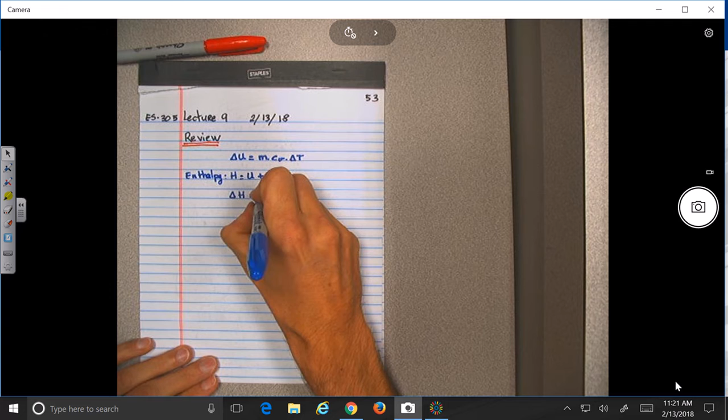Which is defined as what? Internal energy plus work done by the pressure. And we say that the change in enthalpy will be proportional to what? M Cp delta T. So notice that change in internal energy is related to Cv, and change in enthalpy is related to Cp.

So basically in this one, trying to give an explanation, this would just be like you have a closed system. What is the change in internal energy within the system? And that the delta H, in addition to taking into consideration the change done within the system, we also take into consideration the work done by the pressure.

All right, so let me give you some relations. So this will be relations you can add to your units sheet that you can take in the exams. All right, so those relations, let me go find them on the book.

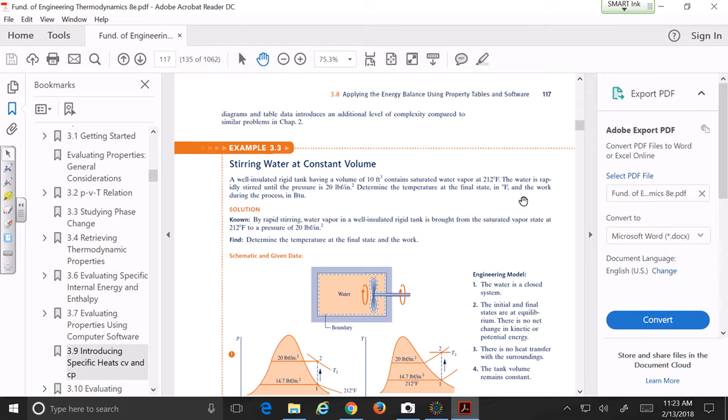So we are on chapter 3, so I'll see if I can find them here. This relation between Cp's and Cv's. So basically, we've been talking about Cp's and Cv, and gamma is defined as, so what was gamma? Do you remember gamma? We say different gases have different compression ratios, no?

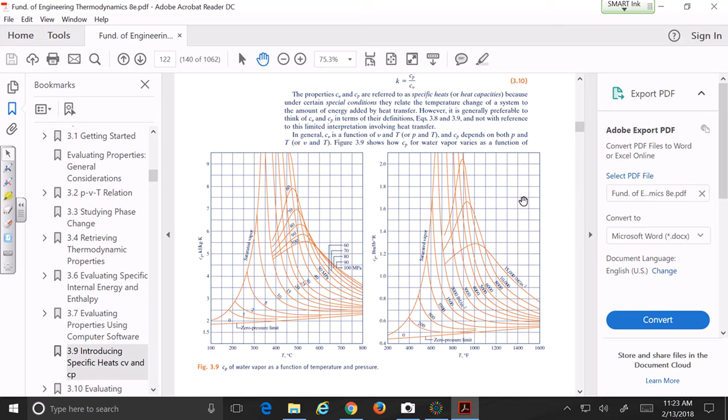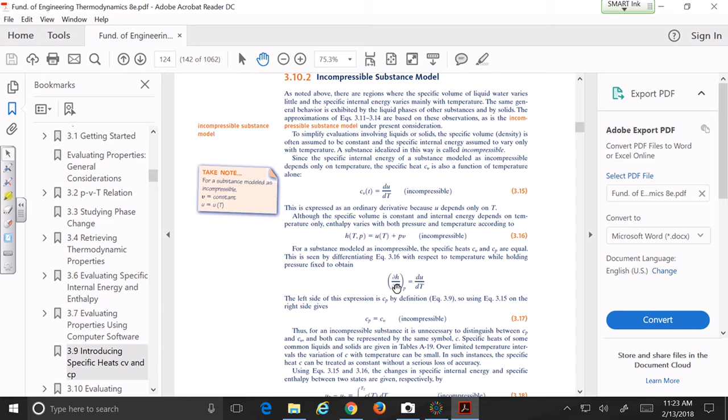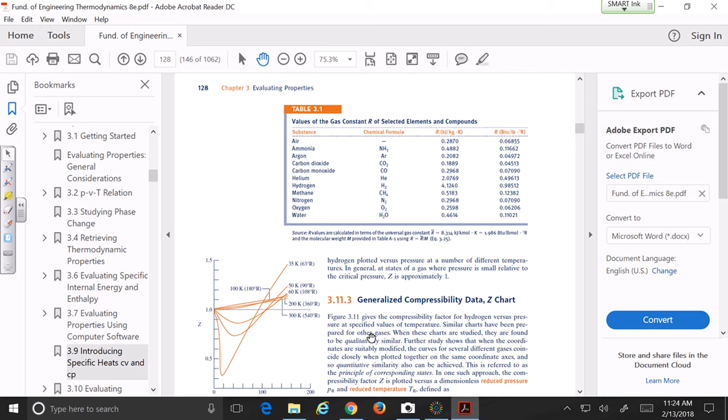Okay, so the real definition of gamma is Cv over Cp, or vice versa. Let's find out these different relations then. So Cv, I told you, is the change in internal energy as a function of temperature at constant volume. Cp is the change in enthalpy with respect to temperature at constant pressure. So for incompressible substances, you have Cp equal to Cv. But let's page down, let's see if we find the relation for compressible.

Okay, what are the relations? Is this not showing the whole page? Okay, there we go. All right, so it's actually reversed. So let me come here... oh, I don't have to do that. So let me remove this, and let's see if I can do this over here. Maybe I can do the other side, maybe better. All right, so basically gamma, which is the gas constant.

All right, so in the relation, for example, we have PV to the gamma equal to a constant - for what type of process is this one called? Polytropic process, no? So you have a different gamma for different gases because different gases might compress differently, okay? So that gamma, which in the book is called K, is defined as being equal to what? Cp over Cv.

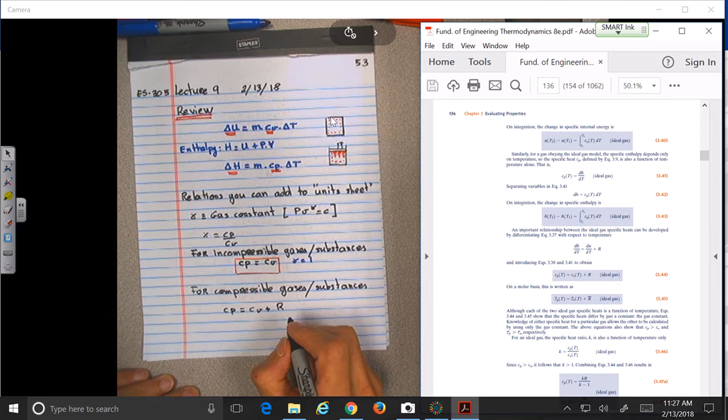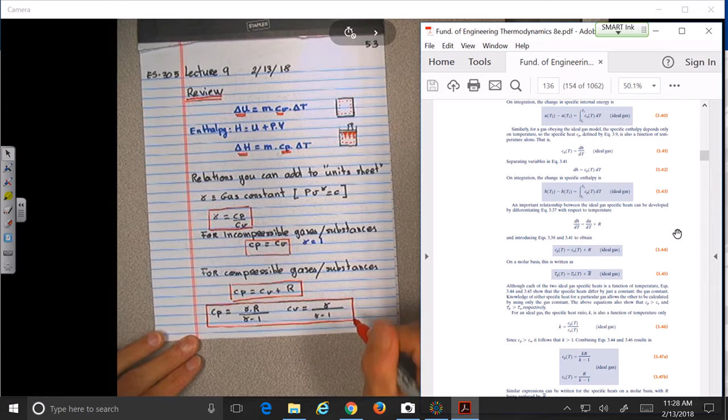Okay, so if we combine this equation here with this equation here, you can actually show that what? Cp, C sub P is equal to gamma R divided by gamma minus 1. And that C sub V will be equal to... R divided by gamma minus 1. No, it's both gamma minus 1. If you look at it, I'm just copying this relation from here, okay? Their K in the book is our gamma.

Okay, so this relation - there's nothing to derive, so I'm not going to ask you to memorize them. I think that learning is understanding, and there's nothing in understanding in memorizing, no? So these relations here, you can see like gamma equals Cp over Cv, Cp equals Cv plus R, and these two relations over here. You are more than welcome to add them to the unit sheet that you can bring to class and to the exam. Again, I'm not going to test you in memory. I'll test you in understanding.

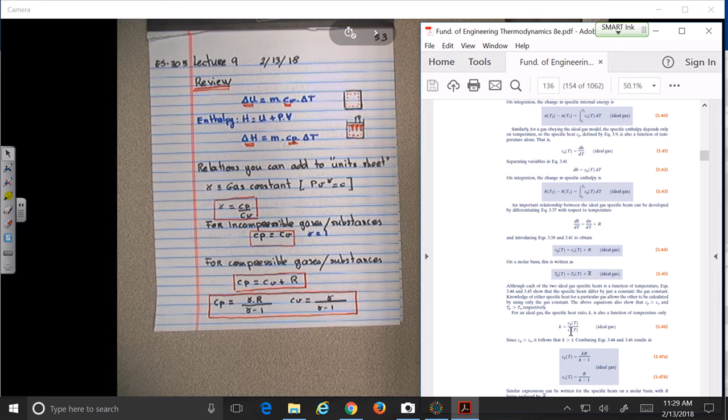Yes? On the 3.47b, is that the one that you were doing for CV? It's got R on top. Yeah, but what I'm saying is that you see on the book is K, no? Right. Okay, the K and the class notes is our gamma. Well, I mean the one below that because it's got an R. Oh, it's R. Oh, C for CV. No, you're right. So you're completely right. So this one is, instead of gamma, is R. Yeah, sorry for that. Thank you.

Okay, most important here is that really you realize what? Is that you see here that the change in internal energy is proportional to Cv dt, no? That's really the part that I want you to understand. And the change in enthalpy is equal to the integral of Cp dt. That's the important part for the understanding. This is a matter to know these relations, in case you need to use them in a problem.

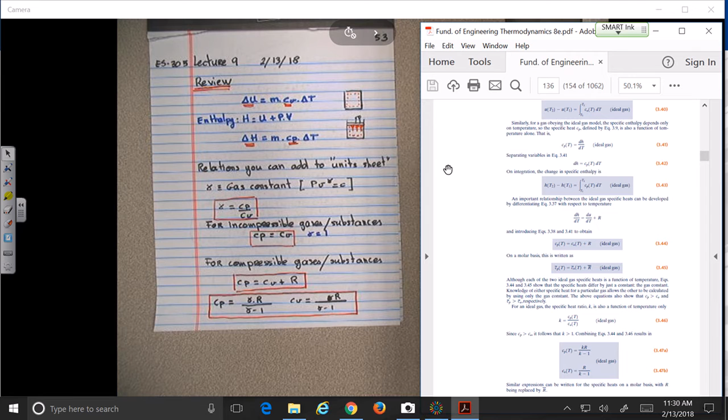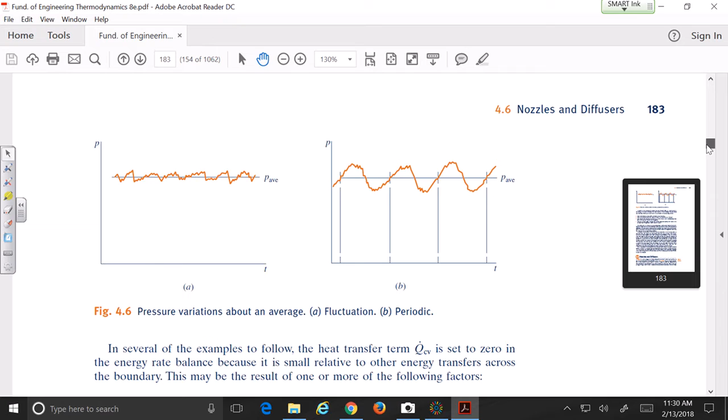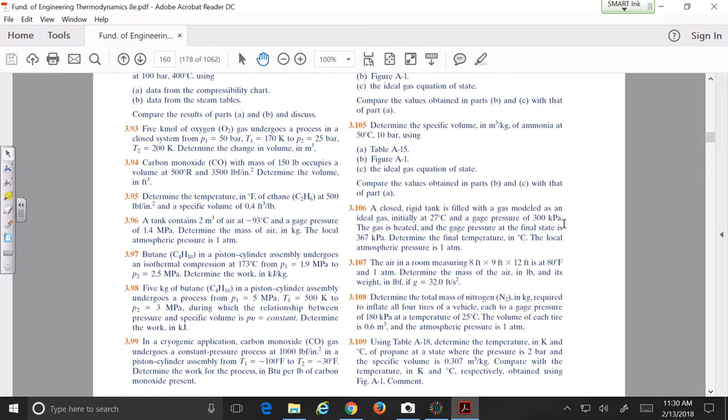All right, so let's do problems. Let's see what we can do. So let me magnify this for a second, and let's try to find problems on chapter 3. I think I went a little bit fast here. So what is the highest number we did as the homework problem so far? 56, okay. 3.89 is a classic one for something different.

Okay, let's do 3.85, okay? I like the one with pictures, I don't know why, but. So 3.85. Let's see what that problem is about. So page 54, we're gonna do problem 3.85.

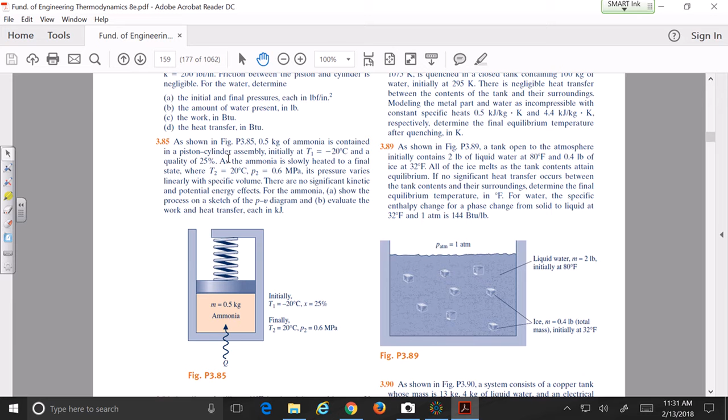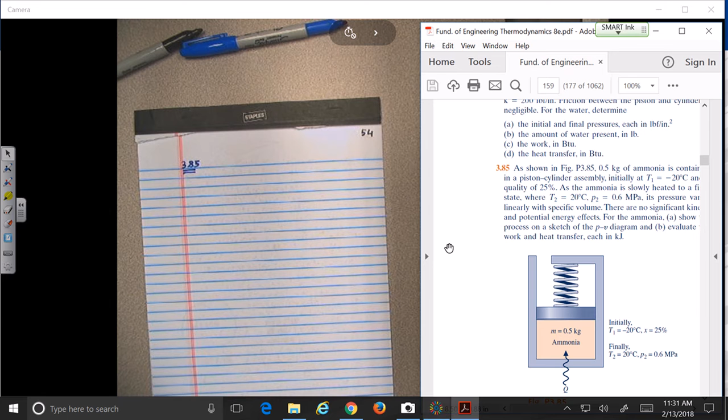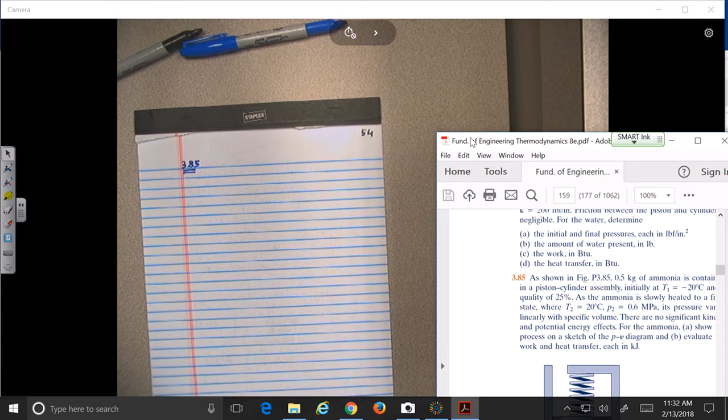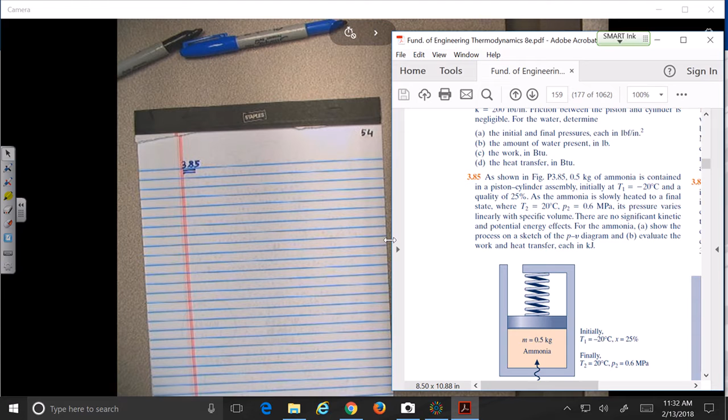Okay, so let me see if I can do this again here. I'm gonna minimize the bottom. Oops, that's not what I wanted to do. You see what I mean? I wanted to make it a bit here shorter, but a bit wider. There you go. Okay, so that way we can have the problem statement and my page.

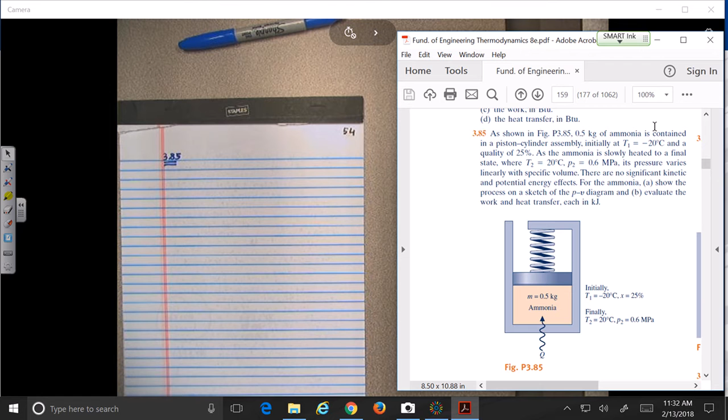Okay, so as shown in figure 385, let me do a little sketch here of figure 3.85. Remember all this is part of the solution of the problem. Okay, so our system here is this one over here. M equal half a kilogram, and what is the substance? Ammonia. Okay, looks like to the ammonia they're gonna add some heat Q, and that we know that initially we have T1 equals minus 20 degrees Celsius and X1 equals 25%, sorry. So what is the state of the ammonia?

So it would be a mixture as state 1, no? Then at the end, they give us that T2 is equal to 20 degrees Celsius and P2 equal to 0.6 megapascals. Okay, so let me start reading the problem. So as shown in figure 3.85, half kilogram of ammonia is contained in a piston cylinder assembly, initially at T1 minus 20 degrees Celsius and a quality of 25%. As the ammonia is slowly heated to a final state where T2 equals 20 degrees Celsius, P2 equals 0.6 megapascal, its pressure varies linearly with specific volume.

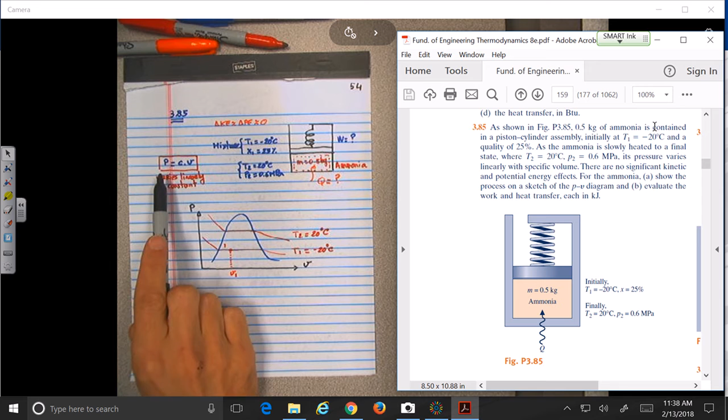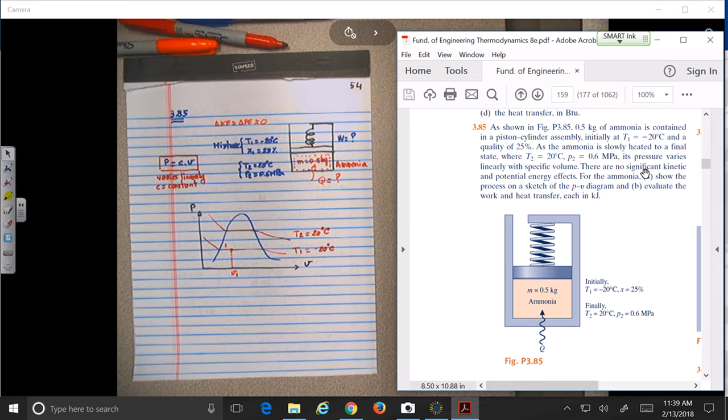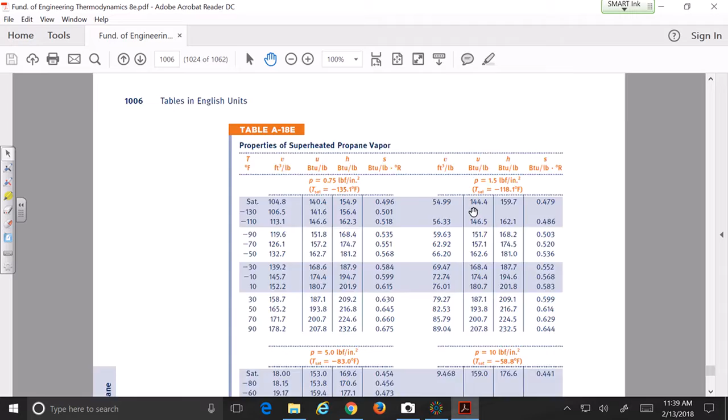But anyway, so we know this, let's see. We need to go to the tables for what substance? Ammonia. Again, I ask you to bring the tables. I'm going to go big here because I don't want to waste too much time. So which one are the tables for ammonia?

13? Okay, otherwise I will go to... what is this one, 5, come on, 13, okay, I trust you. I'll go here. Okay, 9. This is refrigerant 134A, 12E. Okay, for ammonia, so here we have table A-13E.

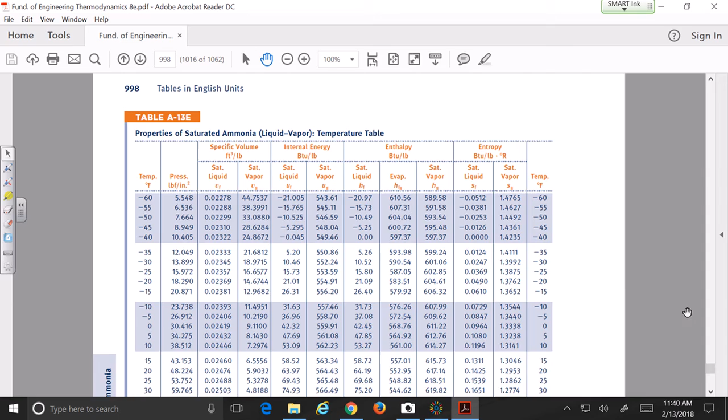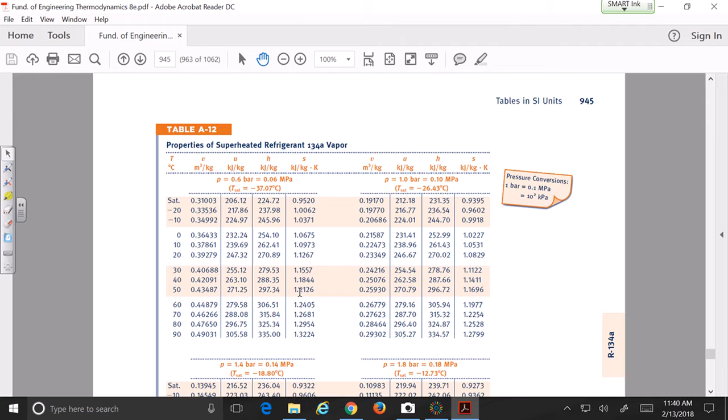So this is for English units, that's not the one we want. We want the one with... so page down, this A-13. Okay, so temperature for ammonia, liquid vapor, this is what we're looking for.

So minus 20 over here, all right, would be this line over here. Okay, so from table A-13 at T equal minus 20 degrees Celsius.

Let's see, what do we have? I don't know what is all the information we're going to need, but okay, so let's say P1 should be equal to what? 1.9019 bar, no? Okay, next, what do we have?

V fluid, V gas. Which one needs to be higher, the V gas or the V fluid? What takes more volume, gas or liquid? Gas. So let me write the one for the gas. So the gas is 0.6233 cubic meters per kilogram, no?

So what would be the value for the one of the fluid then? Is it 1.5038 times 10 to the 3 or 10 to the minus 3? 10 to the minus 3.

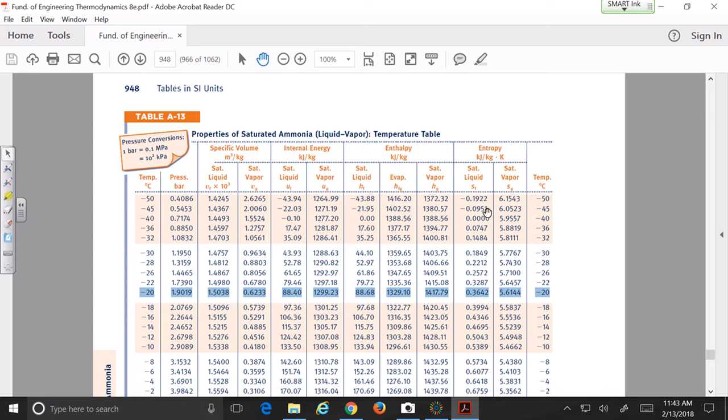Okay, I was writing all this stuff, but I needed to see the table, so I just wrote all that information there. That's why I asked you to bring the tables, no? Again, guys, I'm not trying to scare you, but if you don't practice using the tables, it's like doing a free throw in basketball, no? You are taking a gamble. So in order to know how to use the tables, you need to practice.

What's the power on V sub F? It says times 10 to the negative 3. You see on top of the table the part times 10 to the 3, no? So what it means is that they have pre-multiplied that value by 10 to the 3. Oh, okay. Yeah, it's tricky.

That's what I told you before. The way to remember this, if you need to multiply by 10 to 3 or 10 to minus 3, is to understand what takes more volume: gas, a substance in the gas state, or in the liquid state. Okay, makes sense. That makes sense? Yeah, it's tricky, I agree with you.

All right, so now that we know VG and V fluid, how can we find V1?

Do you remember that page where you have the two figures, PV and TV diagram, that has on the first side like 3 or 4 relations? One of them is what? V1 will be equal to what? V fluid plus X1 times V gas minus V fluid. Yeah? Remember that page? Okay?

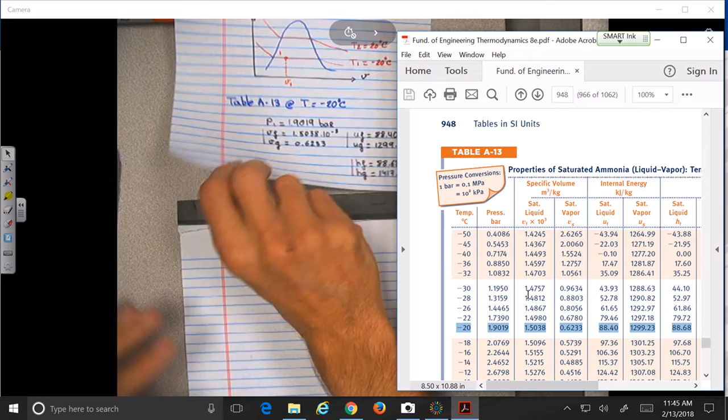So we have V fluid is 1.5038 times 10 to the minus 3, plus X1 is 0.25 of... is that relation correct? Is it V fluid? Yes, no? Yeah, did you check it?

And then we have V gas is 0.6233 minus 1.5038 times 10 to the minus 3. So if you do the calculation, what do you find for V1?

I don't know, so I could look at the solutions, but to me the solution is not what's important, it's the process, no?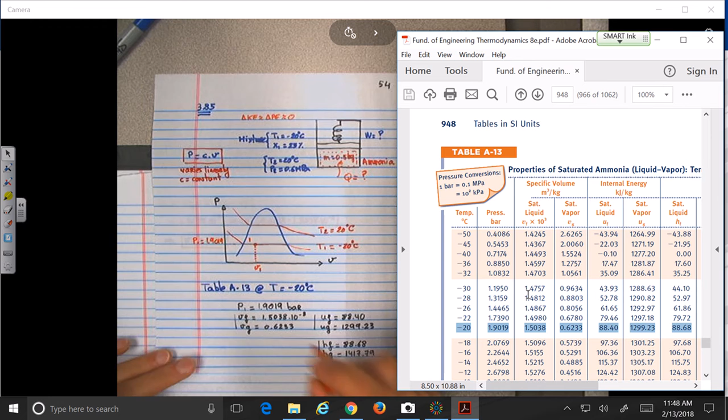So anyway, we have this. So now in this figure, if we want to be very accurate and add values, what was P1 over here? 1.9019. Now we know P2.

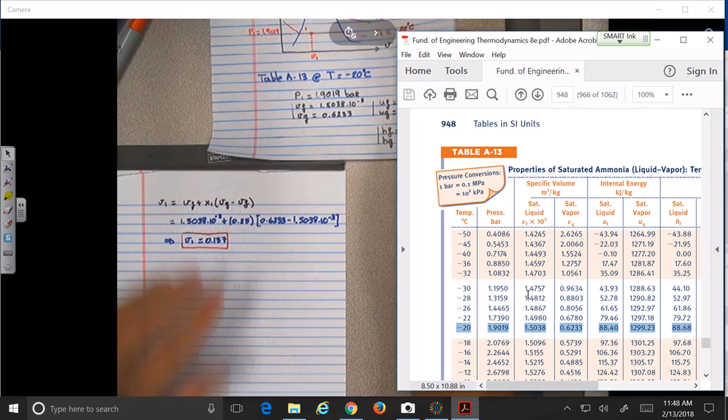So what is the state at 2 now? How can we find what is the state at 2? So we know the temperature over here, and we know the pressure, no? Okay, so if we go to the figure, let's say we go to the figure of temperature.

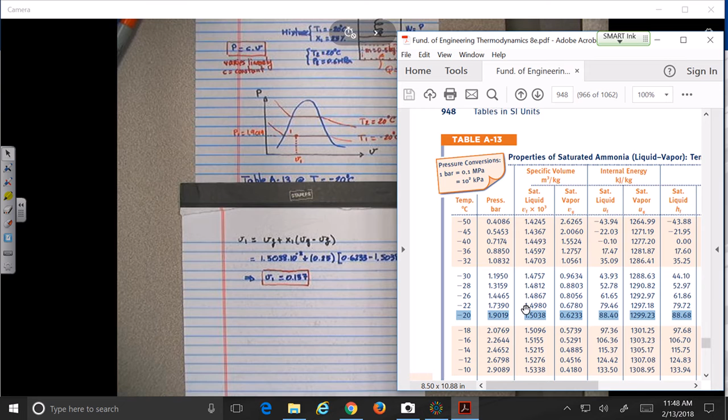So we go to 20. So what is the temperature at 20 here? What should be the pressure? 8.5762, no? So that means that if we look at this figure, the pressure corresponding to this line over here should be 8.5762.

But P2, what are the units for that? Bar. So we need to be careful, we need to change that. So 8.5762 bars, yeah, so that will be, okay.

So let's do one thing over here. So let's say P2, we know P2 is equal to 0.6 megapascals, no? Yeah? Okay, what was the relation? 1 bar was equal to how many kilopascal?

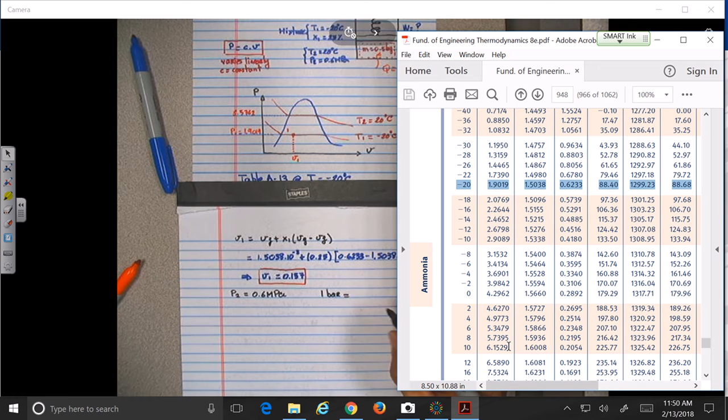I think it's about, what is it, 1.015, something like that? Check the relation, what is the relation between bars and kilopascal? Is it 1.015? I mean, you have that page, guys, with the units. I don't have it, so what is the relation between bars and kilopascals?

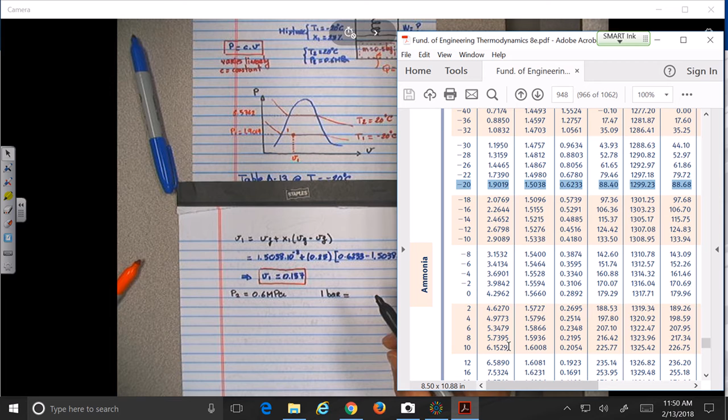One point? No, 0.1 megapascal. So 0.1 megapascals? Is it on top of the chart over here? Yeah, okay good, so then that's good then. Okay, so 1 bar is 0.1 megapascals.

So that means that this will be how many bars then? What do you mean 0.8? It's 0.6 over here, no? Yeah. So we have, so 1 bar is 0.1 megapascals. So 0.6 megapascal would be how many bars? 6 bars, no? Was like, why is it just 6?

So 6 bars, so what does that mean over here then? If we go to the figure, where are we then? We know this is T equal to 20, but we are at P2 equal to, let's say here, 6 bar, no? So what does that mean about state 2? Where is state 2 going to be? On what region? On the superheated or gas region.

What is the pressure for, at 20 degrees, 8.5762 bars. So converting that to megapascal, how are we getting that? Yeah, but this is in bars, all this one we're doing in bars.

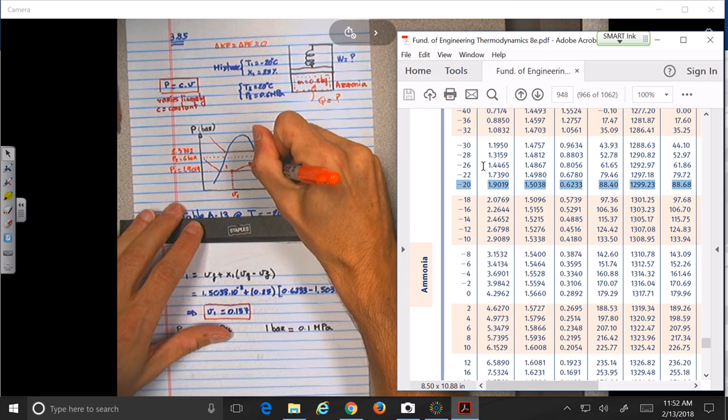And now over here we'll have P2. I mean, you see guys, even if they don't ask you to do the figure, you need to do the figure, no? There is no way to solve the problem without the figure.

Okay, so now that we know that, yes, go ahead. How do you know at 6 bar, how do you know that it's superheated and that it's not still a mixture?

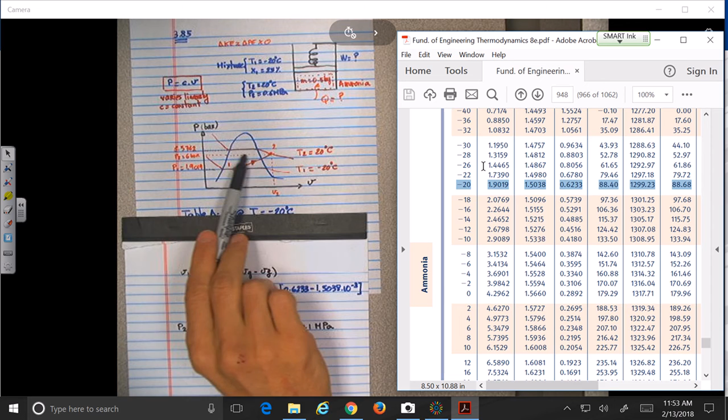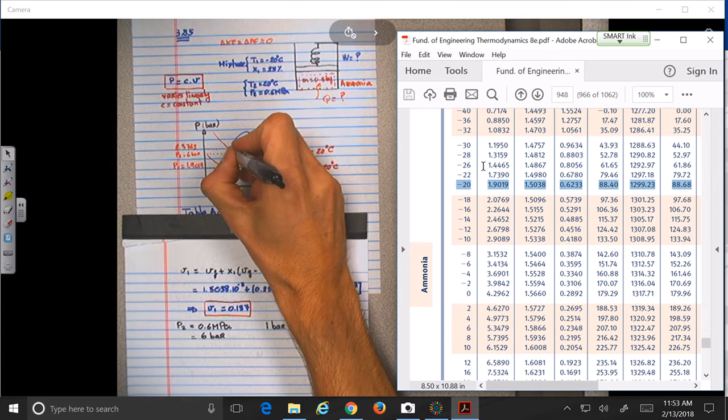Okay, because this line over here, these lines of constant temperature, no? Between this point here and this point here is going to be constant pressure, between 20 degrees and -20. Between this point here and this point here, pressure is 8.5762, no?

So if the pressure was higher than 8.5762, what would be the state? It will have to be along this line, it will be liquid. But since it's smaller, what is the only solution? Is that it's along this part of the line.

Is that clear? Okay, there's no bad questions. Probably more than one person has the same question, okay? So don't be scared or shy to ask any question. This is the time to study with me. Okay, so I'll stop as much as I have to.

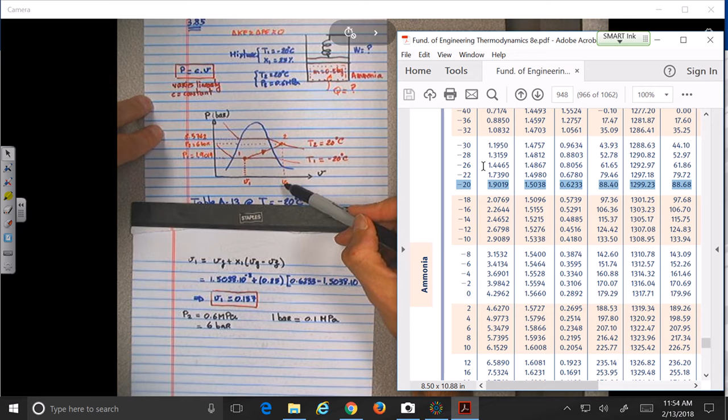All right, so now they tell us that the relation between P1 and P2 is linear. So, but before doing that, can we find V2? Now we know that in order to find V2, we need to go to the tables of superheated ammonia, no? Okay, so what will be that table?

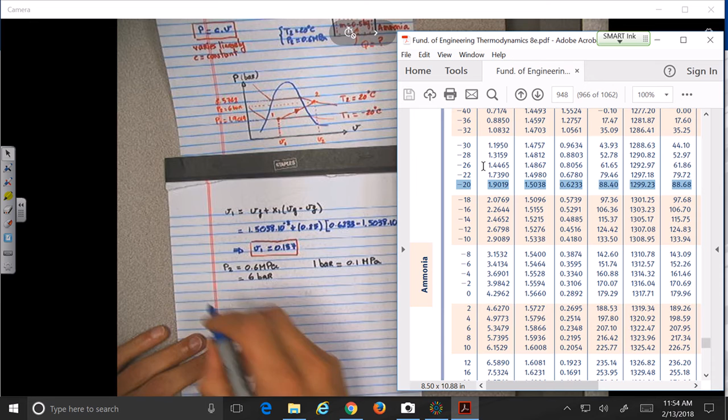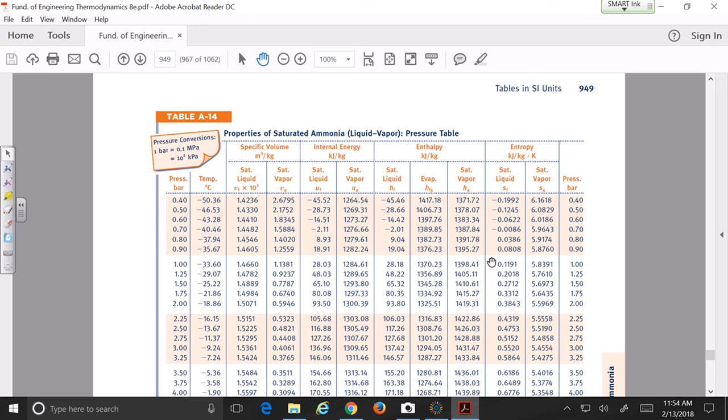So it's probably, is it table A15? Okay, I trust you, but let me magnify this. So table A14, this is still liquid vapor. A15, superheated ammonia. Okay, we have to deal with what pressure?

6 bars. Hopefully we have 6 bars. We don't have to create interpolations because I don't feel like doing any interpolation. So 6 bars, and we have the temperature of 20, no? So this will be the values.

Okay, so table A15. Again, I write it down, then I'll show you on the document. So we have V2, table A15 at P equals 6 bars and T equals 20 degrees Celsius. What do we have?

We have V2 equal to 0.22155. U2 equal to 1347.62, and H2 equal to 1480.55.

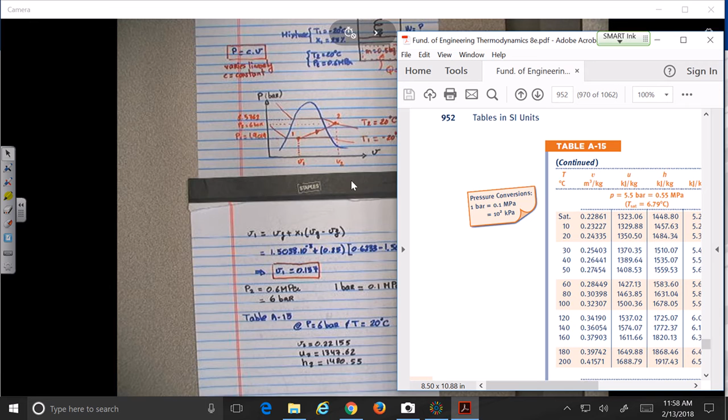Okay, what is this, problem number 85? Let me check very quick. Let's see what they did on the solution manual, because that's a little bit unclear to me. Yeah, I'm gonna go check real quick.

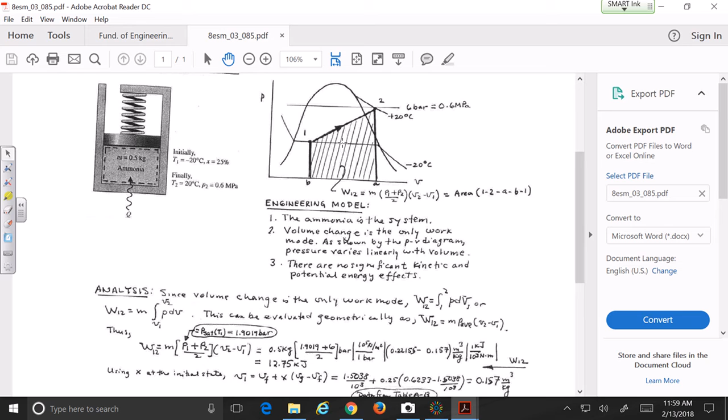Okay, so we are good. All right, that's very good, but that doesn't mean that it's the same thing. Okay, so we got the same figure, that's fine. So they do it graphically, but that's not the way to do it.

What do you get for one and the other? Are they far away from each other or close?

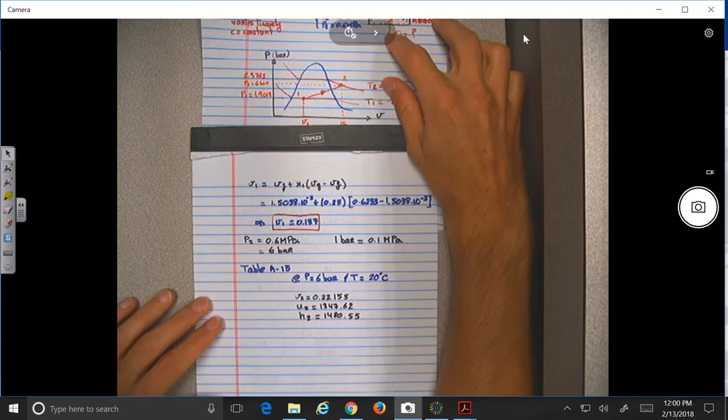We're finding C. So graphically, yeah, it's very easy to know what they're doing. I got C, it was like 63.49 for both cases, I mean you only did it with P2. I just did P2 minus P1 over P2 minus P1, V2 minus, okay, so we can do it that way, that would be even better.

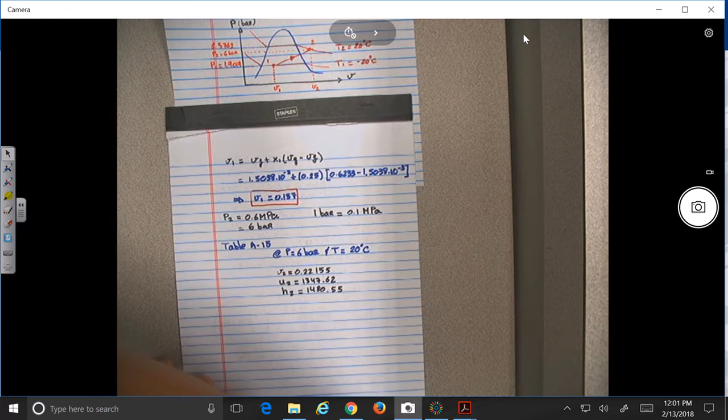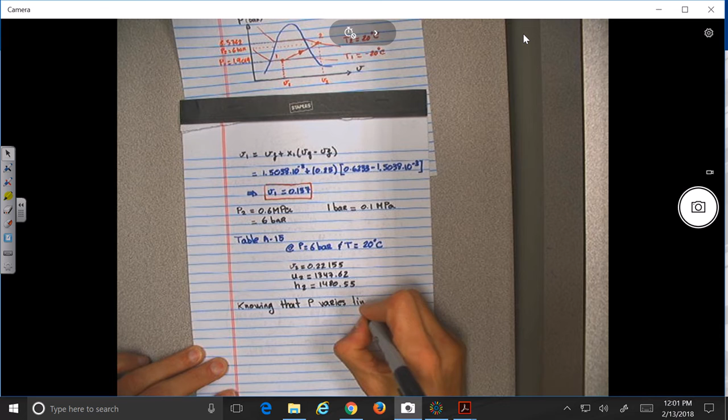We're gonna do it that way, I like that way, all right? So basically, knowing that P varies linearly, okay? So I like the way he did it. So we're gonna have 1 and 2, no?

So the change in height, that will be equal to what? Let's say this one, let's say beta here, tangent beta will be the slope, no? Yeah, so it will basically be C. So this will be equal to what? P2 minus P1 over V2 minus V1, this will be the slope, no? So the constant C equals slope.

So we can have over here, so then we have here, slope will be equal to what? So P2 we had, I think the difference would be the same whether you use bars or megapascals. So difference, will it be the same or no? Yeah. So then make sure we use megapascals.

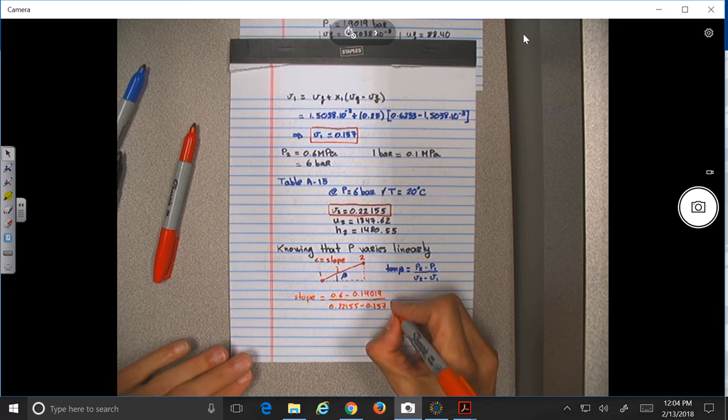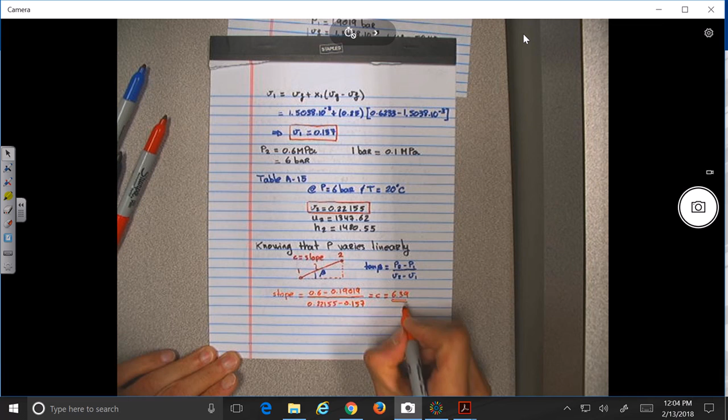So what do you find for the slope? 6.39, 349. 6.39 is enough for me. Will be 3, 4, 349, 35. Okay, 6.35.

So basically, I mean this is just math, but let's see. The function p of v is equal to what? Will be equal to p1 plus cv, no? So will be equal to p1 plus 6.35 v. Is that correct? So now if I do p1 plus 6.35 times v2 minus v1, I should get the value for p2, no?

Okay, so basically this is the equation, 53, 55. Okay, so why am I doing all this stuff? You could have done it graphically as in the solution. But why am I doing all this stuff? Because we know that the general definition of work is equal to what?

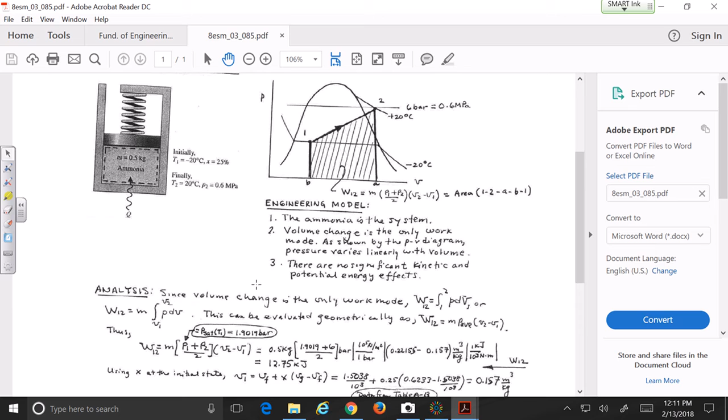So what do they get for the energy? They don't even tell you. So what do you get? Okay, so if you cannot do it, I'm not... Oh, you got like 11.9. Okay, that's fine. They had 12.75, so 11.9 is fine with our 11.9.

Can somebody... Okay, you get 12 point what? I mean, why do we get that? You see, guys, what I tell you about using your calculators? Even those little things can be different. So, what about having somebody double check this one? We have 11.9 and 12 point something so far.

I mean, the day of the exam, somebody's not going to do it for you.

Let me try something here. Okay, that will work.

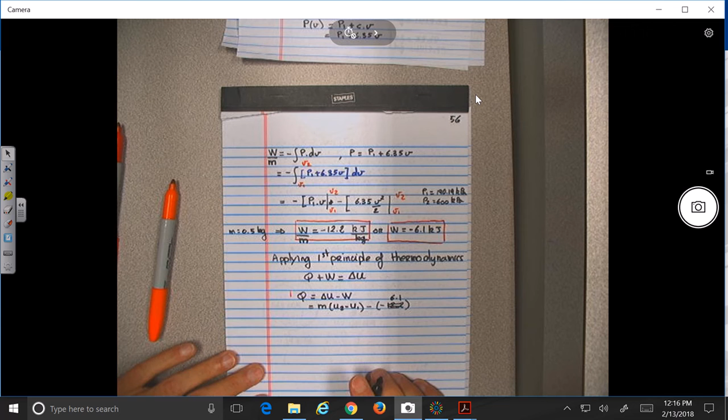All right, so over here, in order to do that calculation, we know M is 0.5. We know what is U2, U2 will be equal... so we know M equals 0.5. U2 is equal to what? 1,347.62. Okay, the work, we already put it over there, is equal to minus 6.1 kilojoules. Now, what is U1?

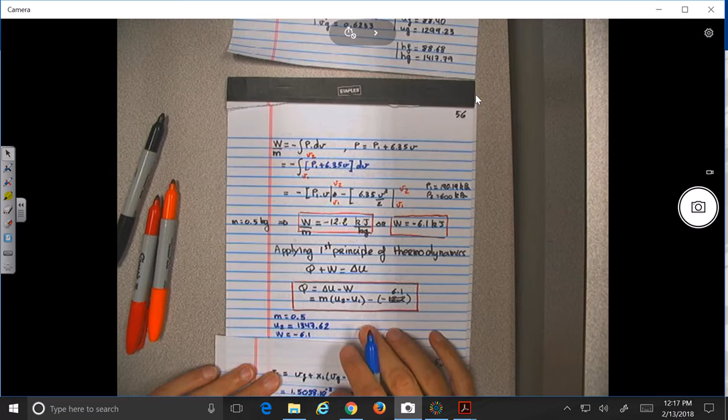We should have calculated that one, but what would be U1? In order to find U1, what do we need to do? The same thing we did here for V1, right? We do the same thing. So we have U1 will be equal to UF plus X1 times UG minus UF.

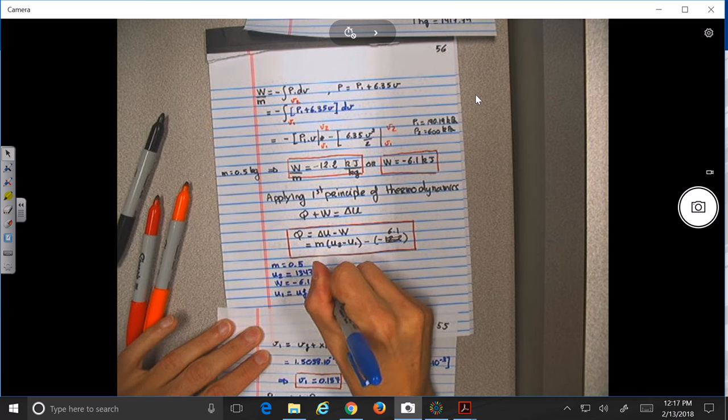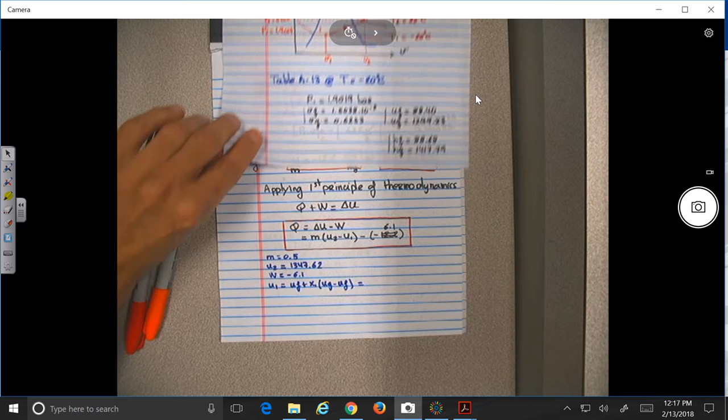I'll let you do that calculation. Where UF and UG are equal to what? Whatever we had at the beginning: 88.4 and 1299.23.

So what do you get for U1? 39.1. Oh, 391. Yeah, I get 391 as well, 391.1, okay, and this should be kilojoules per kilogram, okay? So now, substituting into this equation here.

So Q will be equal to what? Will be equal to 0.5 times 391.1 minus... oops, I did a mistake, minus 1347.62 minus 391.1 minus 6.1.

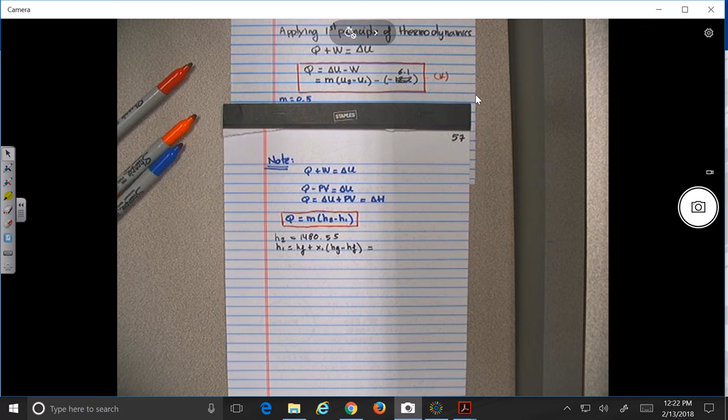729. 708.8. So 708.8. Somebody double checks that. I mean, it will be 88 plus, let's see, 600, a quarter, 200. Yeah, that sounds about right. How did you get 708.89? 708?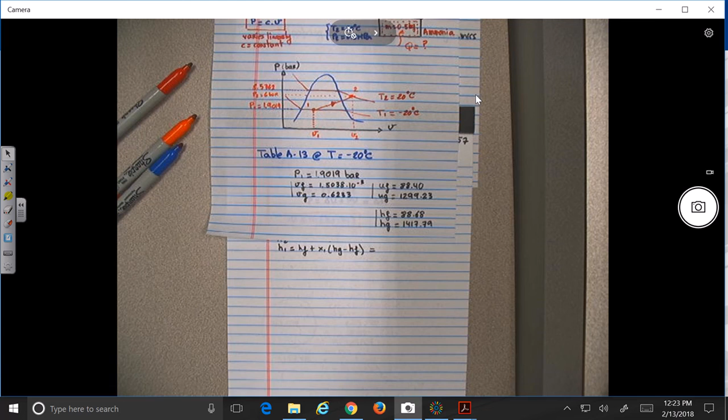708.89. Guys, if you don't do it again, at the end we could say that Q will be equal to 0.5 times, H2 equal to 1480 minus 708.89. So let's say that's about 760 divided by 2. What was the other result we got? 472. What do we get this way? That one's 385.8. 385.8. Okay.

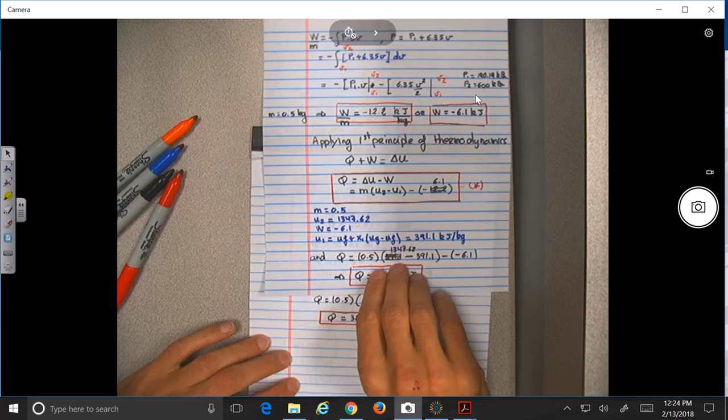Now you see that this is not an exact science, no? All right, so let me ask you a question here, all right? Since we don't have that much time, okay, so let's summarize this. So let's see, 54, 55, 56, 57, okay?

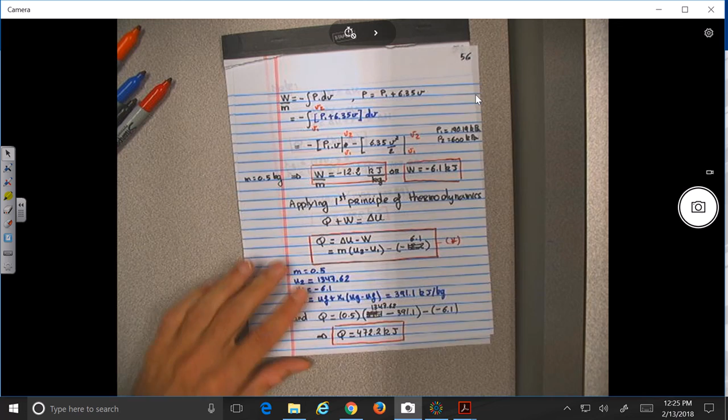So we have to solve this problem over here. Okay? So what is the assumption we are making? That it's linear, no? Okay? So if you assume it's linear, we did other calculation, we did the figure, and then in order to find the work, we did the assumption that this is linear, so we ended up taking this expression here. Okay? So taking that assumption, we found that the amount of heat was equal to 472.2.

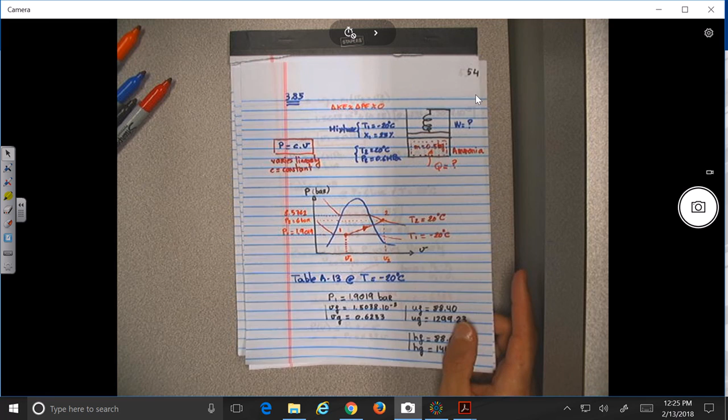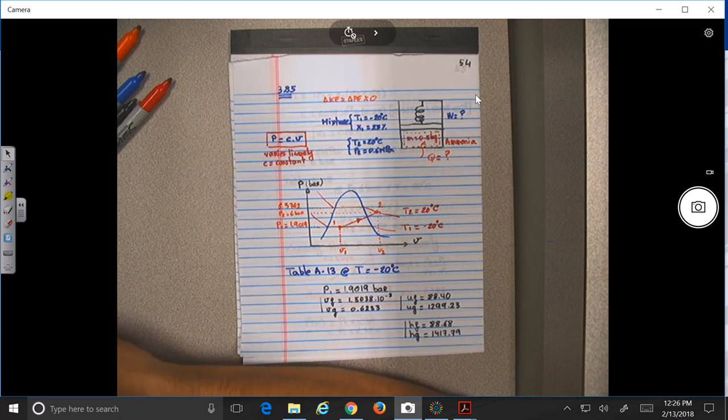All right? Now, generally they don't do it this way, but it's correct. When I did it this way, did we do any assumption about the pressure? So which one do you think should be more accurate? Probably this one, no? But again, thermodynamics, like engineering, is not an exact science, no? So you see, for example, on the exam, you do this problem either on one way or the other, you're going to get different result. But that doesn't mean that what you have done is wrong. Yeah? Okay? So basically, can you say that this was a very good assumption or not a very good assumption? It's not a very good assumption for this case, no? Okay? But again, generally, they don't want you to do this, okay?

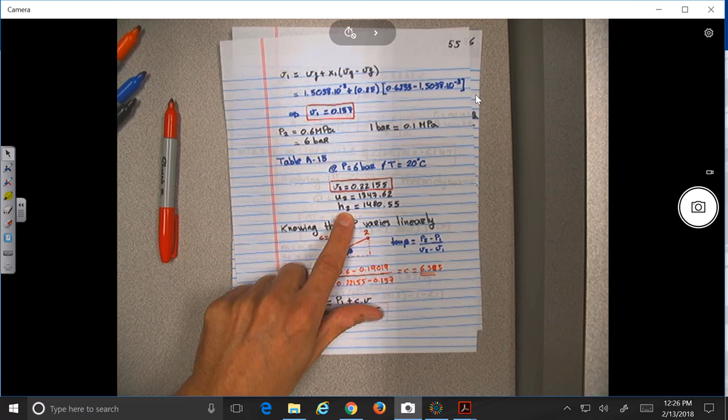Yes, go ahead. Which HG value did you use? It says 1480. What table did you use? That one comes from table A15. Okay. Yeah, that one should come from table A15 here at superheated. Okay. At 6 bar and T20. H2 was 1480.55. Okay?